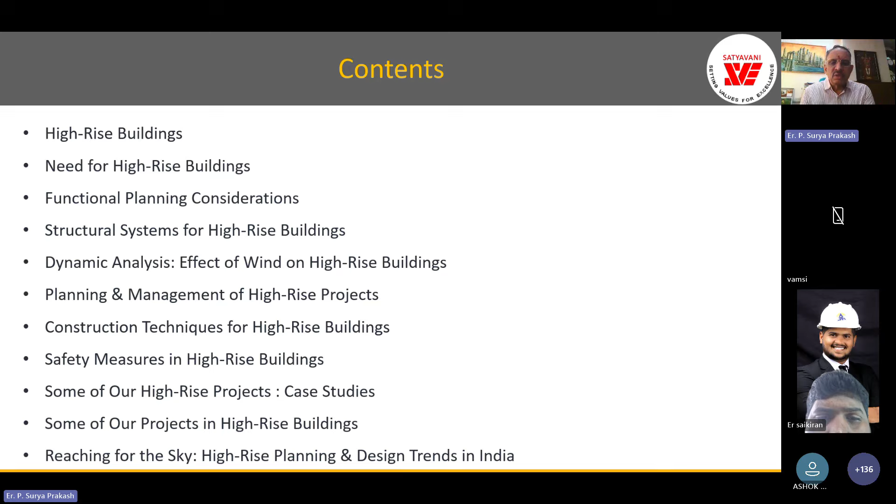Today I'll cover high-rise buildings, need for high-rise buildings, functional planning considerations, structural systems for high-rise buildings, dynamic analysis, effect of wind particularly on high-rise buildings, and planning and management of high-rise buildings, that is construction management. I'll also cover construction techniques, safety measures, and some of our projects, the case studies we have done, and high-rise buildings reaching for the sky. If time permits, I'll cover design trends. This is the order of my presentation today.

A high-rise structure is a tall building. Any building more than 15 meters, as per the National Building Code, is called a high-rise building. In residential, we also call it multi-dwelling units. The need for housing is growing every day due to population growth and rapid urbanization in India. Most cities and states are crossing urbanization of 50% of the population.

So we have to think of how we can utilize the land available and still accommodate the growing population. That is the main demand and challenge that we engineers and planners have on hand. It's a tall, vertically oriented structure. It influences design, construction, and performance. And of course, maintenance and safety are very, very important.

Wherever land costs cross beyond, let us say, 3,000 rupees per square feet, it calls for high-rise buildings. But another challenge is access roads. Nowadays in some cities, not as per the bylaws, people are building 7-story or 10-story buildings on a road width of 30 feet or even 20 feet. That's not to be encouraged or permitted by engineers because it affects the safety of the people living in and around the building.

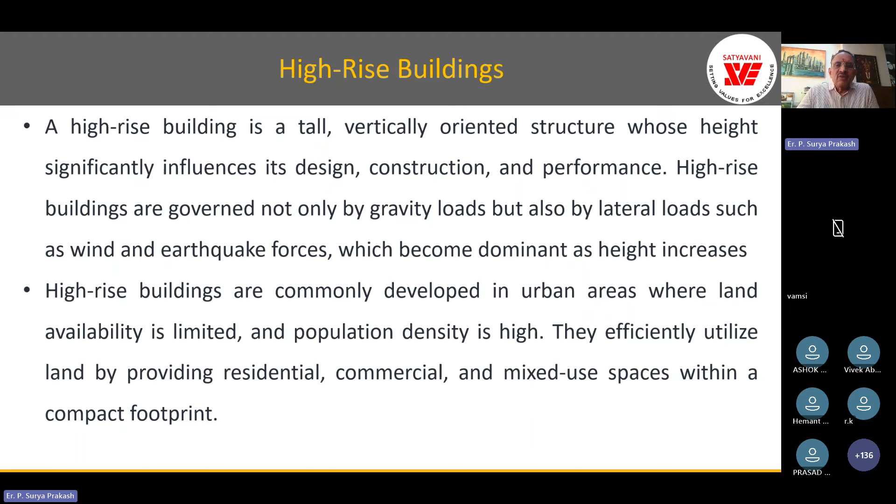We have seen what happened in Nepal post earthquake. It is very difficult to evacuate, to rescue people, and to provide relief. Even for a fire engine to reach the location in case of fire is very difficult unless you have the minimum for a high-rise building, which is more than 15 meters. Even for 7-story, the minimum road width shall be 40 feet. This is what we have to consider while talking about high-rise buildings.

And structurally, if we think about a high-rise building, it acts like a cantilever with adequate strength, stiffness and stability to resist mainly the shear and bending, and overturning effects. This is the main thing.

And it demands careful understanding of the structural systems, because in fact, we all know the best designer in the world for skyscrapers is Bill Baker, who has done the Burj Khalifa building. He made a statement when he was visiting India that in a design competition for a skyscraper, they will first consider only the structural system and the economy in the design.

Because if we don't provide the right structural system, the cost of construction is sometimes going to be doubled. So we also have to think of serviceability criteria of drift, vibration, and occupant comfort. Occupant comfort: when the first skyscraper, the Empire State Building, was built, people learned to design the window panes for wind and to accommodate the drift and vibration during wind conditions. So a lot of codal provisions have come in for taking care of occupant comfort.

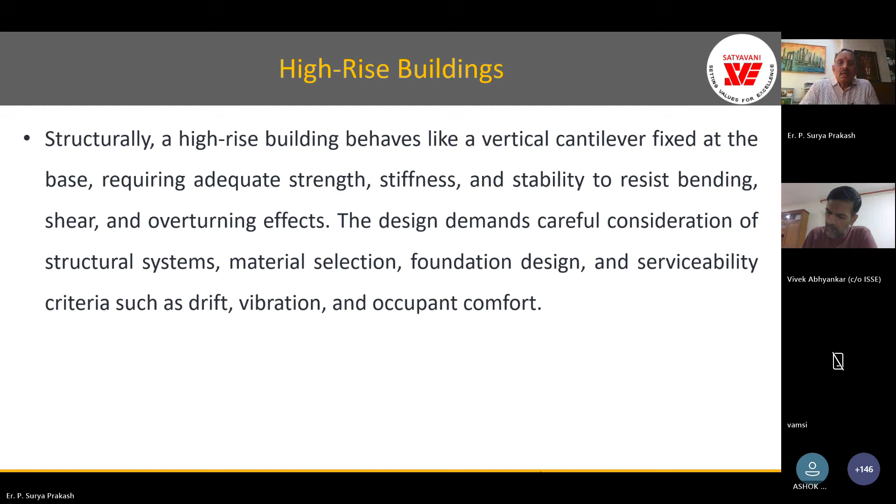When we talk about skyscrapers, Burj Khalifa comes first. I visited it during construction about 3 times, from foundation to finishing. It is so fascinating to see the structural system concept, the construction methodology, and how the building was completed within the timeline. So construction methodology, structural system, and buildability aspects are all covered best in this building. And we can still call it the best and tallest skyscraper as of today.

Just a day or two ago, I saw the Saudi Arabia building is just crossing the Burj Khalifa height now. So we have to wait till its completion for it to be called the world's tallest. Burj Khalifa is the best tall building in the world in structural efficiency and structural concept. And Bill Baker, when he was interviewed in India, made a very interesting statement for a common man. How do you design this kind of skyscraper because of the wind? He said, we confuse the wind.

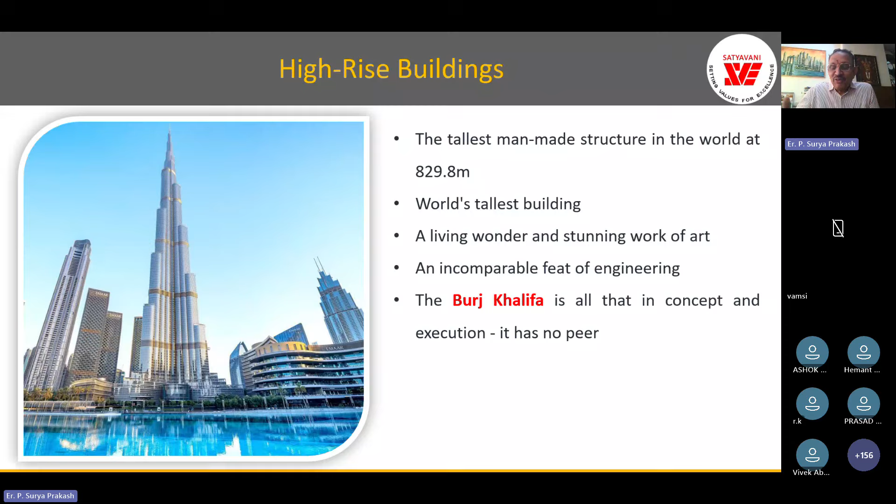So how do you accommodate that kind of additional force in the foundation? What they did is they rotated the building. If you see the Y shape, they rotated the building by 60 degrees so that the drag effect on the building is reduced to half. Because of that, they could use the same foundation designed for 500 meters for this 829. That is the beauty of structural engineering, the beauty of confusing the wind. So this is about Burj Khalifa, information I collected from the designer himself.

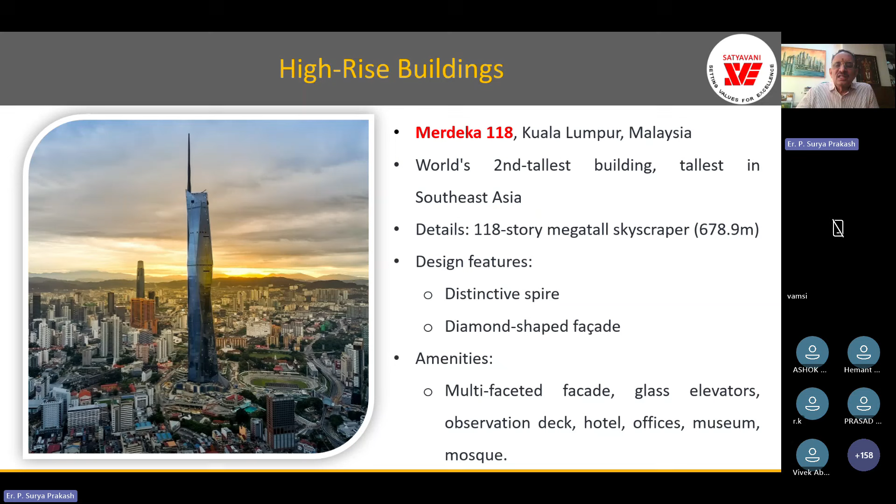Next, high-rise. There are many high-rise buildings. Merdeka in Kuala Lumpur comes next, second tallest after Burj Khalifa. And we have the Shanghai Tower in China, with very interesting shapes. In fact, these are not just the fascinating shapes of the architect. These are shapes arrived at to optimize the loads in the building. Every shape has a purpose of minimizing the wind effects on these skyscrapers.

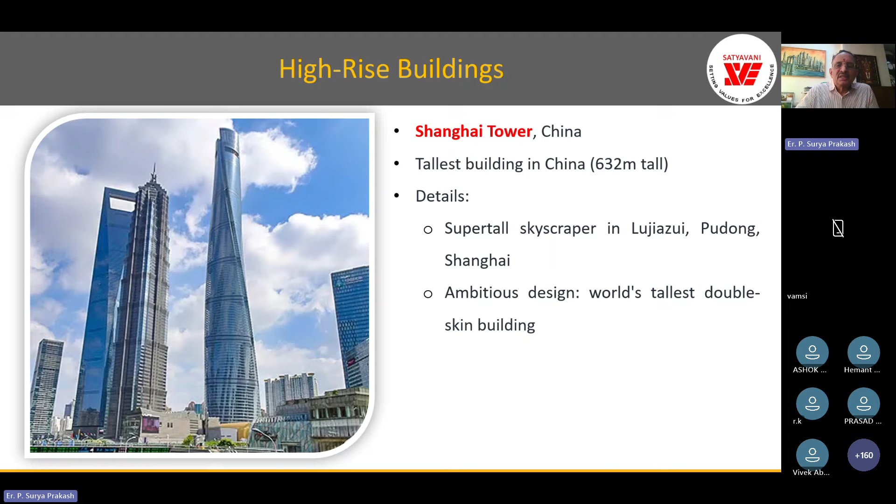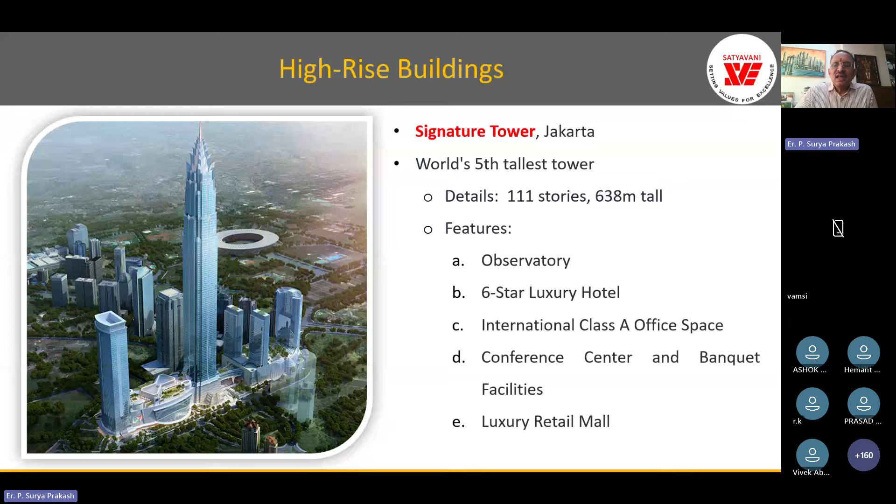And the need for high-rise buildings is to optimize the land use in densely populated areas. If you come to Hyderabad nowadays, in fact, Hyderabad has better master planning. They have identified certain pockets which are called skyscraper zones, so they have encouraged builders to construct skyscrapers. And now Hyderabad is having 60-story buildings and crossing more than that. And the advantage is they have provided the corridor for infrastructure, whether it is approach roads, power, water, drainage, stormwater, all these are very important.

Structural system definitely is important, but before the structural system stage comes, we should also think of all these utilities. And one Singapore funder told me, any FAR more than 7 will put a lot of stress on the infrastructure, that is the utilities. So it's very important to think of these things as engineers for us to encourage or propose these kinds of skyscrapers or high-rise buildings.

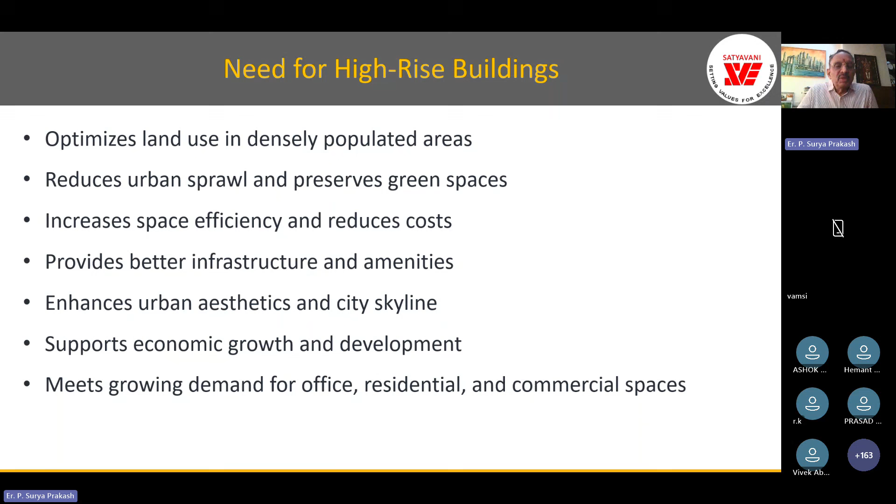And we know that the residential, office and commercial activities are complementing each other. If you have office space, then there is employment. If you have employment, there is need for residential. And if you have these two, commercial or social infrastructure is very important, like institutional, hospital, all these come around these two, office and residential. So we have to think of high-rise buildings wherever the density of population increases.

So finally, the need for high-rise buildings is efficient land utilization, and rapid urbanization and population growth insist on high-rise building implementation, and then economic development and land value optimization also. It is very important. Reduction of urban sprawl, as I mentioned, optimal use of urban infrastructure, and advancement in structural and construction technology will also drive this growth of high-rise buildings.

Over the last 20 years, we have been implementing Mivan or rigid monolithic construction. With that technology, the implementation and buildability of high-rise buildings has become quite handy for engineers, contractors, developers, and builders. So improved living and working conditions because of the compactness.

Suppose you have 2 lakh square feet per acre, which will drive about 1,000 people living in an acre. And we are doing a project on 100 acres in Hyderabad, where the expected population is about 50,000 people. That means 500 people per acre on average in 100 acres, which is quite high.

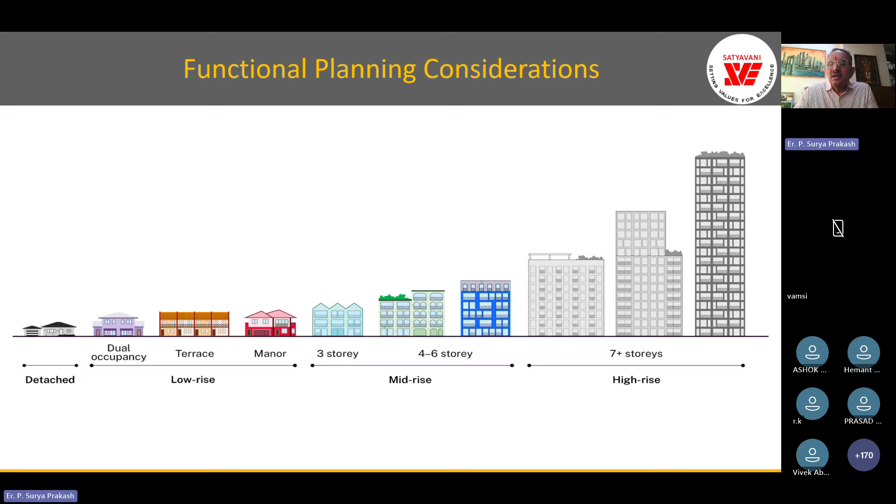So for planning considerations, I'll briefly cover this aspect because it's very important for all of us. Building use and zoning, that is, the development control regulations. We have to study that before even proposing anything, because it covers aspects like social infrastructure availability, basic education, healthcare, all these things. Next comes the important topic of floor planning in high-rise.

As we all know, as the height of the building increases, the service core percentage keeps growing. Normally it is around 20%, the connectivity within the building plan. It grows up to 50%, even 60%, the core requirement. So the core planning and the core location are also very important.

Vertical transportation, whether elevators or escalators, the speed of elevators, number of elevators, capacity of the elevators. We must know there is software available for designing vertical transportation, depending on the number of stops and the type of stops we propose, the population, and the time zones of population movement, whether it is a working population or a retired population. We have to consider that and design the vertical transportation.

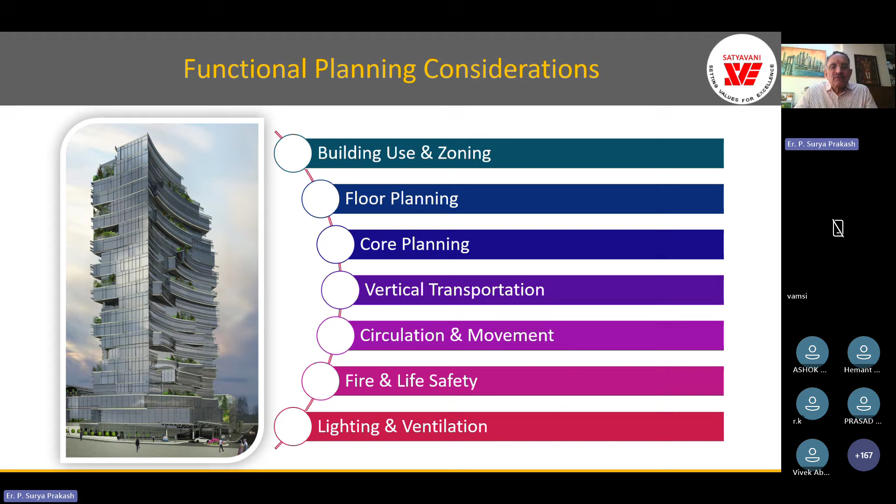We have to see that whatever planning is done provides natural light and ventilation. We are all now talking about green buildings, and for green buildings we have to make the effort to ensure natural light and ventilation are provided. Minimum abutting road width, as I mentioned, and traffic analysis. We do this for all high-rise buildings: the traffic analysis, the adequacy of the road width, and the number of lanes connecting to the building.

Setbacks, that is, the open space around the building. That is very, very important for any high-rise building. The minimum open space required is 7 meters all around the building, for the movement of fire engines and evacuation of people. And internal transport within the campus, corridors, and service ducts.

Yesterday or the day before, I was reading about the LIC building in Chennai, which was the first high-rise building in India, a 14-storied building. It was subjected to a fire accident in 1975. Then they realized that the ducts provided for services, whether plumbing or electrical, carry the fire to the upper floors, because they connect everything, along with the staircases. Because of this, the fire norms changed. We have to plug the duct at every floor level. These are all very important safety aspects.

And fire escape staircases and travel distance, as I mentioned. In high-rise buildings beyond 30 meters, we provide pressurized shafts. We have to provide a pressurized staircase and pressurized lift so that people can escape through them without being affected by smoke.

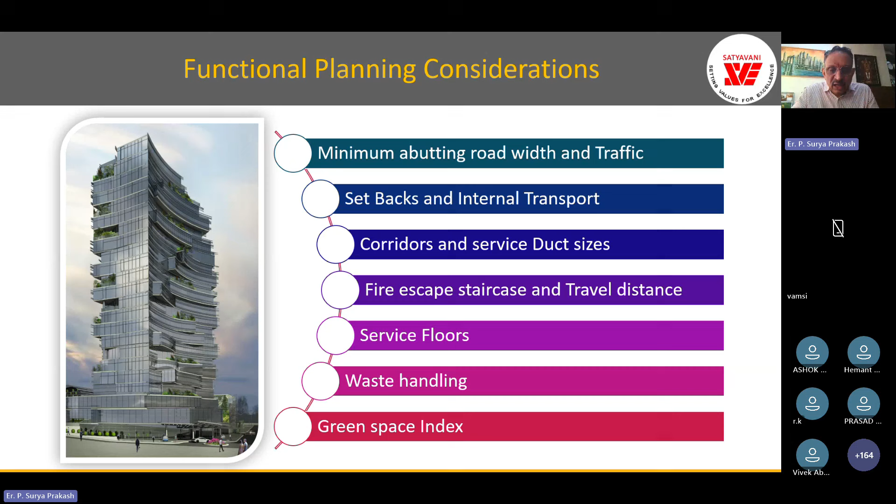In Singapore, the green space index has become compulsory. That means if you are constructing a building on 1 acre and you provide greenery over an area of 4,000, then your green space index is 1:1. So we have to think of the green space index when we are densifying areas with population.

Now, for us, the most important structural systems for the high-rise buildings. Let us see the structural systems of the available buildings, already constructed buildings. And before that, let us understand what is moment resisting frame. That is the very basic system.

For up to 7 floors or 10 floors, we can have just moment resisting frames. And then beyond 10 floors, we must have shear wall systems. We'll add the shear wall. And then we also have dual systems, that is combination of shear wall and frame. When I say shear wall, nowadays, the Mivan or rigid monolithic construction is with the complete shear wall system.

And next is the tubed frames or outrigger systems. So these are further advancement. In fact, Fazlur Khan from Bangladesh, he is the first one to introduce these tubed frames. He is inspired from the bamboo, because bamboo tree is the natural tallest structure actually. Tall in the sense of slenderness, from the slenderness ratio, height to minimum dimension. So he is inspired from that natural structure and then devised these tubed frames.

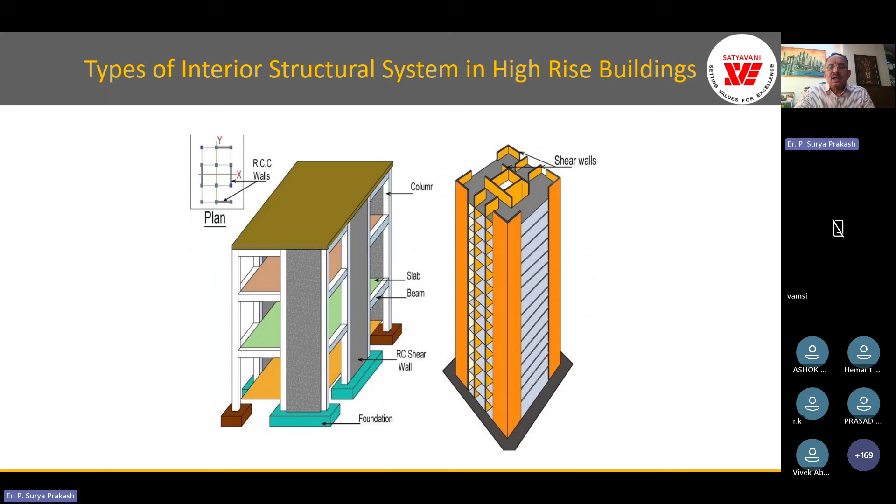And in Chicago, the first tubed frame, Sears Tower, it was the tallest in those days, during the 1970s, about 50 years back. And after that, further advancements have come with the outrigger systems and buttressed core and all that. Let us examine these systems. You can see in the picture the shear wall and the frame combination. And on the right side, you can see the cores and the shear wall combined with the frame also.

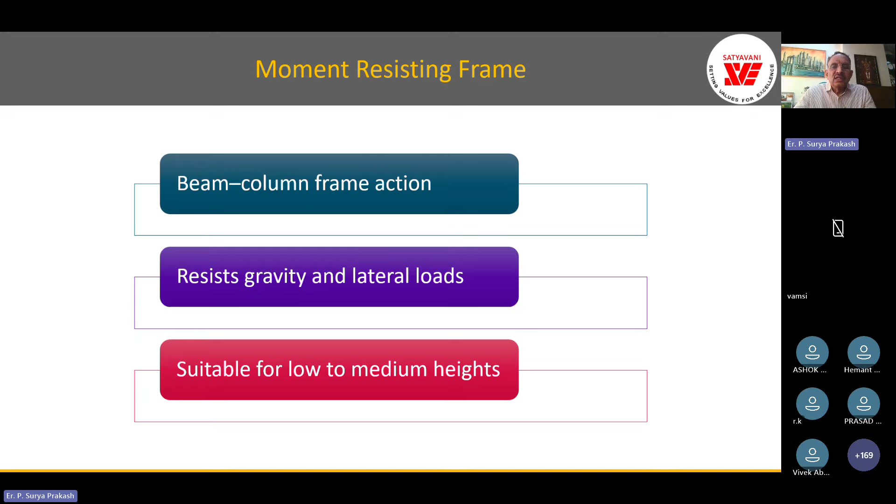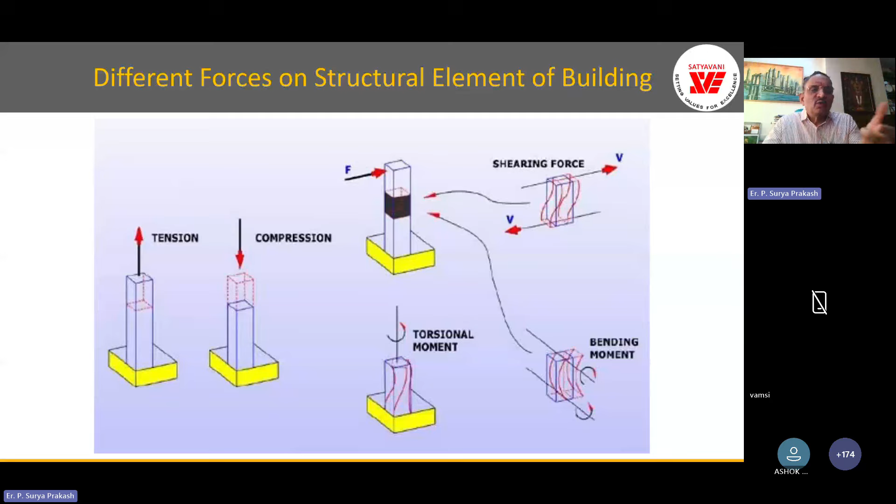Beam column frame action resists gravity and lateral loads, moment resisting frame, and suitable for low to medium heights. As I mentioned, anything from 3 floors to even 10 floors, we can go for these moment resisting frames. And as structural engineers and civil engineers, we must know the basic things, whether it is high-rise building or normal building: tension, compression, shear, bending, and torsion. These are the forces for which we have to think of designing and resisting using these capacities of the elements. So we should know which elements are good in resisting what: tension, compression, shear, bending, and torsion.

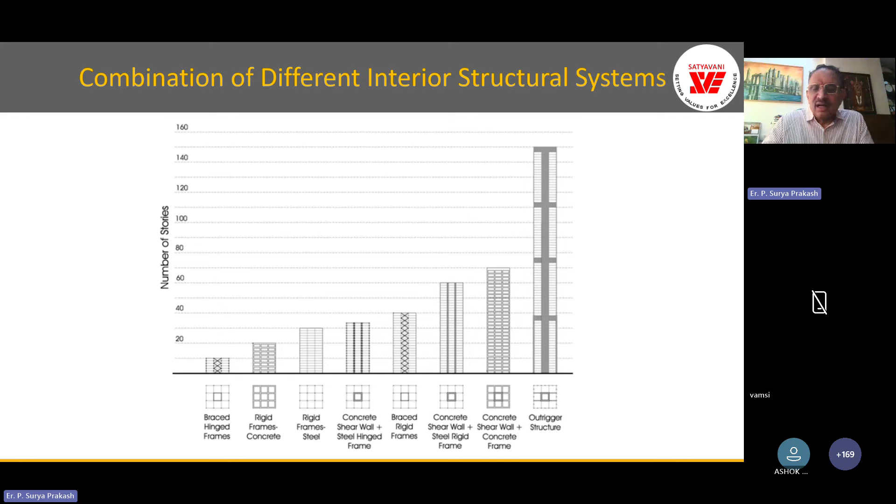And now let us look at worldwide, what are all implemented. We have the braced hinged frames, we have rigid frames and rigid frames in steel. We have concrete shear wall and steel hinged frame. And we have braced rigid frames, concrete shear wall with steel rigid frame, concrete shear wall and concrete frame, and outrigger structure. That means we have the central core connected with the rigid diaphragm to the outer frame. So that is called the outrigger structure.

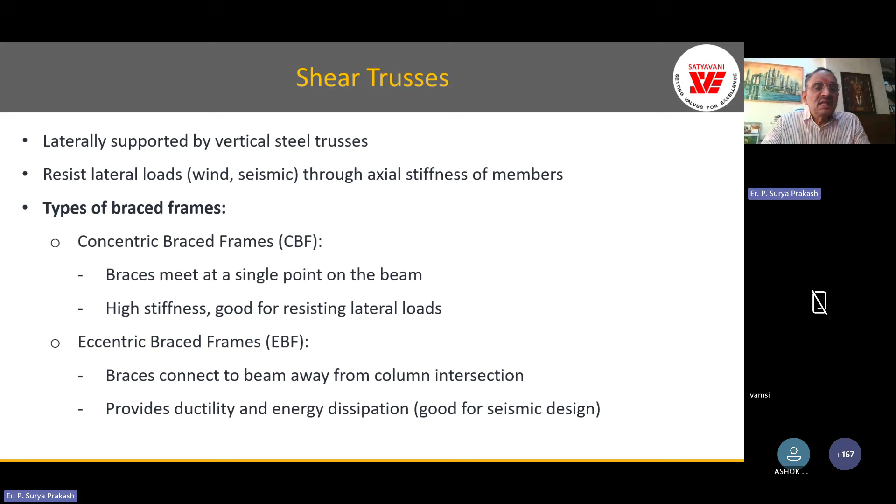So now laterally supported vertical steel trusses in shear trusses resist the lateral loads, and the main lateral loads are wind and seismic. And then braced frames, we have concentric braced frames and eccentric braced frames. And mainly, let us understand whatever structural system we are talking about is finally to dissipate the energy. And we can dissipate the energy with a little bit of flexibility in the structure rather than total rigidity, actually. That is the ductility we are talking about.

So that's why we use steel also in the structural system, because steel is very good in ductility, but it has 2 disadvantages: fire resistance and corrosion problem. Shear trusses are effective in resisting lateral load and can be designed for high stiffness and ductility depending on the type of the frame.

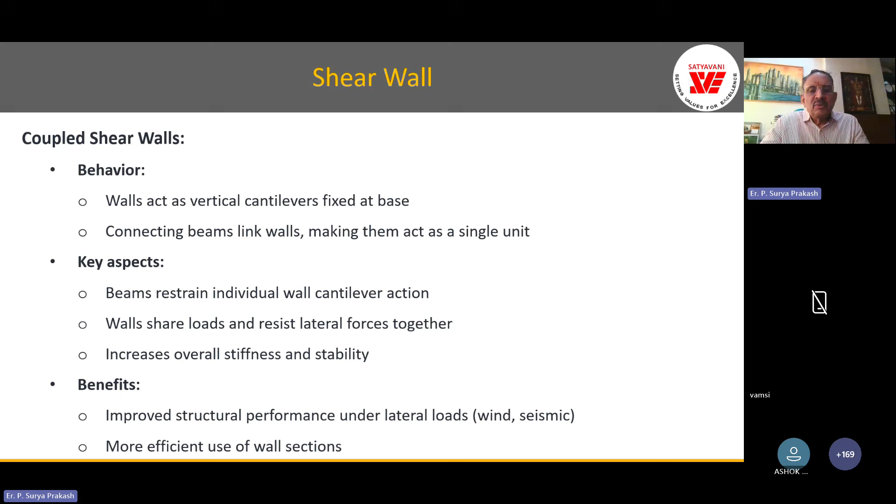Then coupled shear walls: two shear walls coupled with the beam connection will help. In a beam we have tension zone and compression zone. So similarly a shear wall, which is a very rigid thing. If you have two shear walls on the windward side and leeward side, then it acts as a beam with the coupling as shear connectors to these two stiff shear walls. Basically, shear wall is a plane stress element, and they share the loads and resist lateral forces together, and improve structural performance under lateral loads, particularly wind and earthquake.

So let us look at this structural system like a braced frame and shear wall with base isolation. So this is the basic structural system for any earthquake resistant design or wind resistant design. For earthquake only, we need the base isolation. For the wind, we need these bracings, which will be very effective, and shear walls in transferring the loads.

So now let us look at the rigid frame construction, that is rigid monolithic construction, which is quite prevalent nowadays in almost all the high-rise buildings and tall buildings. This has become a norm. So we have to understand the structural system of this, and the name itself indicates it's a rigid monolithic construction. And the advantage is by the time we complete the structure, we also have completed the shell. That means walls, internal walls, and all that.

But the only major thing is we as structural engineers have to insist on having the shear wall continued up to the foundation. In this picture, you can see in the bottom there are columns and the so-called transfer slab. We have to discourage this as structural engineers because in performance it's not very good, and cost effectiveness is also very less, because we are not utilizing such a long shear wall from the top to almost parking level. In the parking level, we are terminating the shear wall. So we are not transferring the complete stresses to the foundation, and we are again creating a transfer slab which will transfer the forces from the shear wall to the columns, and the columns are like a soft story again.

So this is very, very important. We have to keep in mind that we should take shear walls through. Many people say that architects resist this, but I feel that what the developer or architect needs is to plan for the parking. So give a plan. In the shear walls, we can give openings and give the driveways through shear walls. We have done many projects where we have continued these shear walls and derived the advantage of structural efficiency.

Next, they're designed to resist vertical loads as well as lateral loads. And if there is any bad structural system, this is what is going to happen, the failures without proper jointing and without proper transfer medium. So let us understand the shear wall classification. Simple rectangular type, coupled shear wall, rigid frame, framed structure with shear wall, and column supported shear wall. This is what I was telling, not very good.

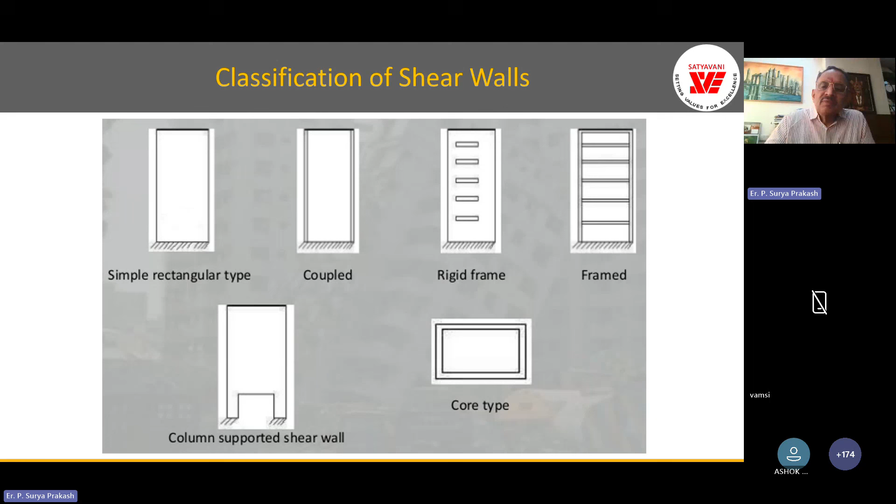And core type. Any building requires staircase and lifts, and they are very good to implement with a concrete wall, particularly pressurized staircase and pressurized lift. Then you can have a core type, and the core you can connect. So that's how this buttressed core concept comes, and you can have the shear walls buttressing the core. So these are all the RCC shear walls. As I'm showing, you have to preferably take the shear wall down to the foundation.

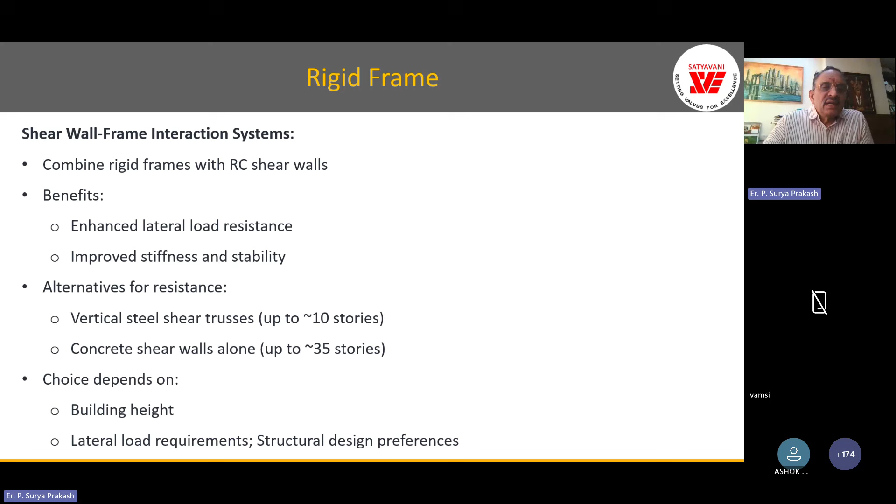Shear wall frame interaction systems, and so these are all the buildings. The good part about it is we are now almost crossing 100 years and 125 years of these tall high-rise buildings constructed in concrete. So we can study their behavior and efficiency, how they have done, more than a century old buildings. So these are all the buildings that exist, and these are the structural systems of braced frames, wall frames and core systems. I'll just quickly show you the structural systems of some existing buildings, hybrid structures and structural systems.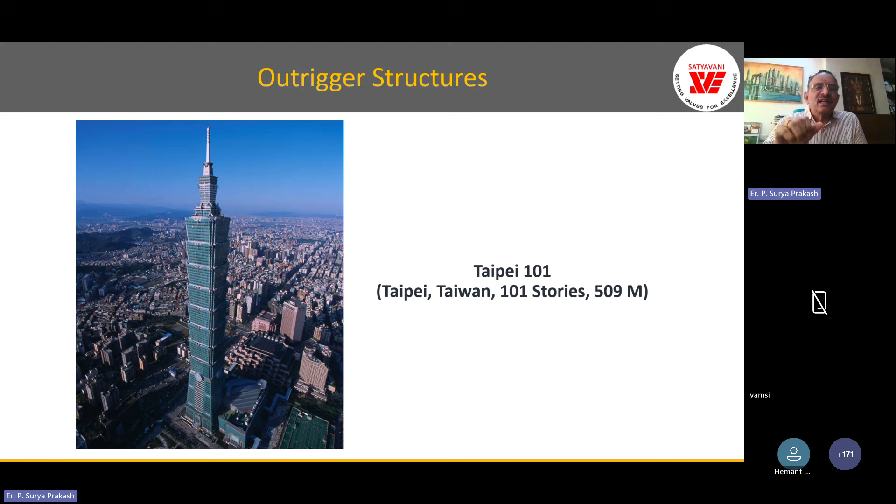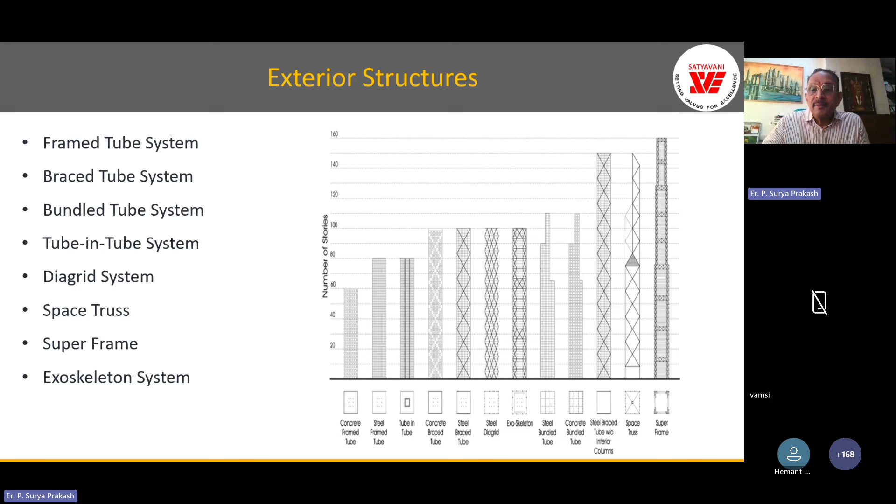And similarly, exoskeleton is another; I'll show you some of the existing buildings in these structural systems. Super frame is another very interesting concept which was used in the World Trade Center. Of course, it's not existing now. So these are all the frame tubes.

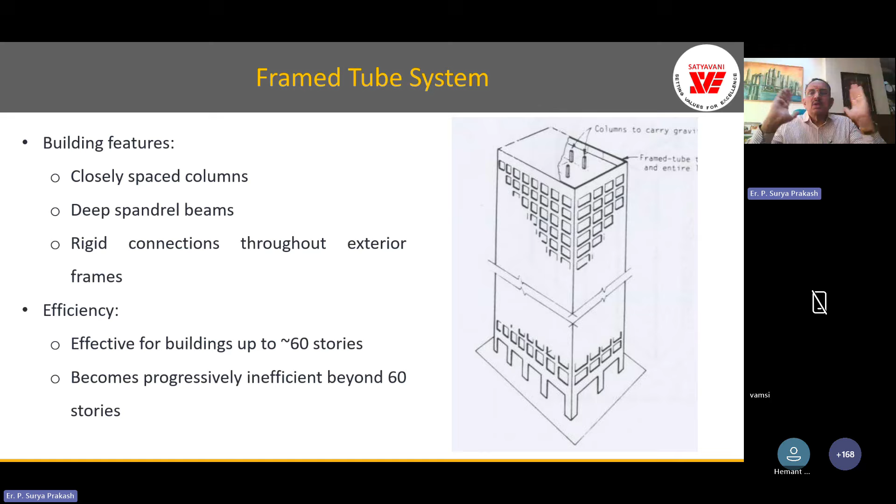That means the outer core is designed to resist the lateral loads, and the inner core is designed to resist only vertical loads. But shear lag is the major challenge in these frame tubes, because at the corners the theoretical versus actual stress will be a lot of difference. So we have to be very careful in using this kind of structural system.

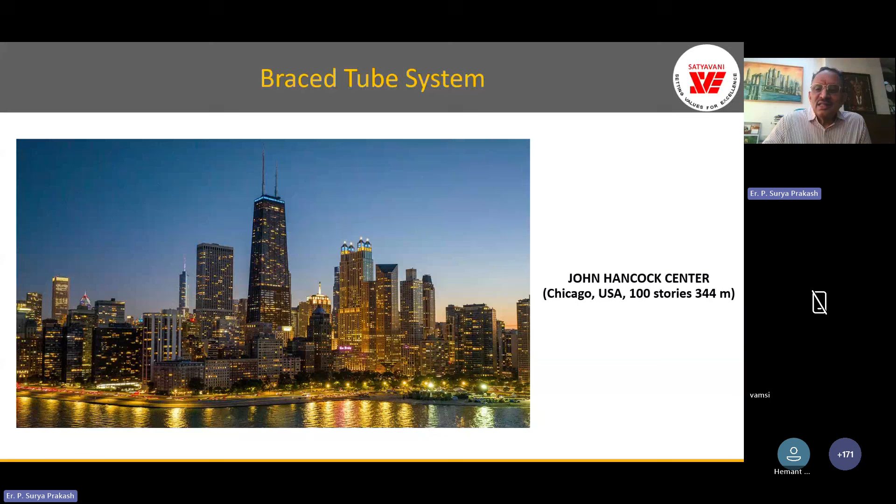Aon Center is a frame tube, and then braced tube systems. We can see the load path and braced frame. And this is John Hancock Center in Chicago. You see a lot of these frame tubes in Chicago because Fazlur Khan was from Chicago, and there is a Fazlur Khan Foundation actually encouraging more innovation in this.

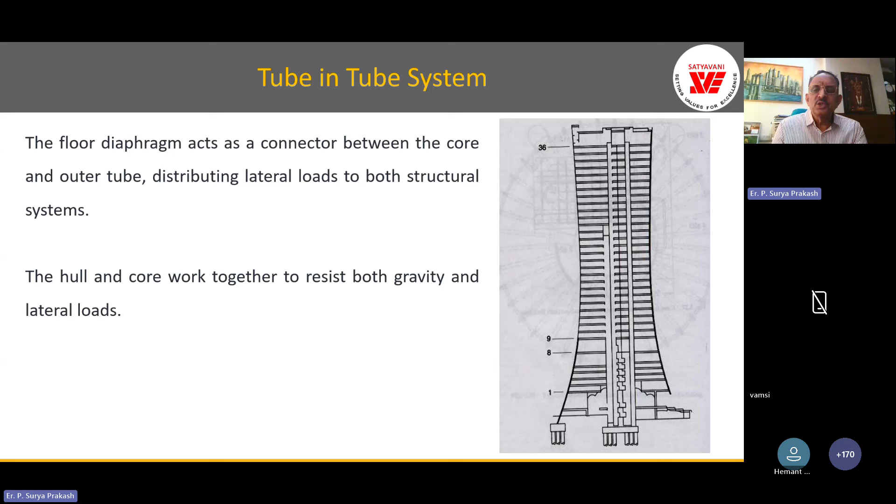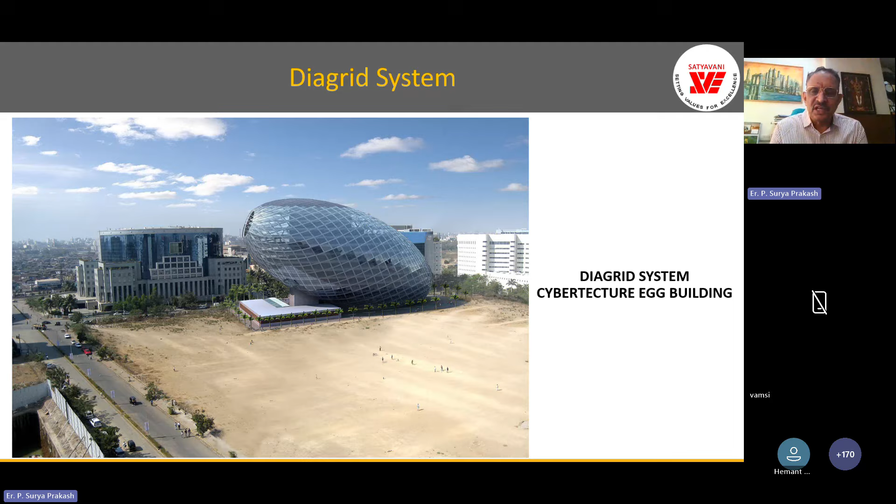Next is tube in tube. This is West Madison Street, Chicago, a 50-story building with a tube in tube system. And diagrid system, this is one of the examples. This is not a real high-rise; as I mentioned, for different shapes only diagrid will be efficient. Super frame, as I mentioned, is not existing now, but this was one of the best structures constructed in steel.

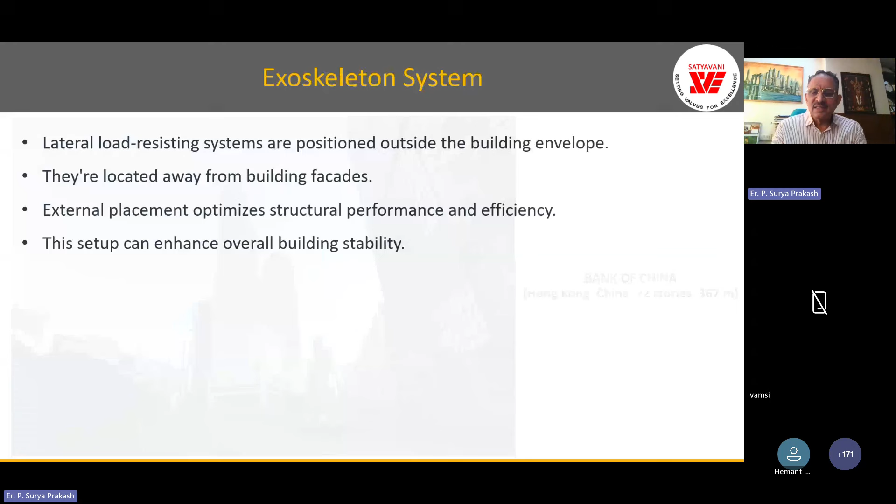And space truss: Bank of China is a very interesting structural system with aesthetics. And exoskeleton: this is Hotel de las Artes in Spain. You can see how beautiful it is with the bracings, and the structure itself becomes the facade. And for a hotel, the facade is always very important. People connect to the hotel with the facade actually.

Next is the buttressed core, the latest and best that we have seen, Burj Khalifa, very efficient. When I visited this structure, in the basement the column minimum dimension is 500 mm for such an 828 meters tall building.

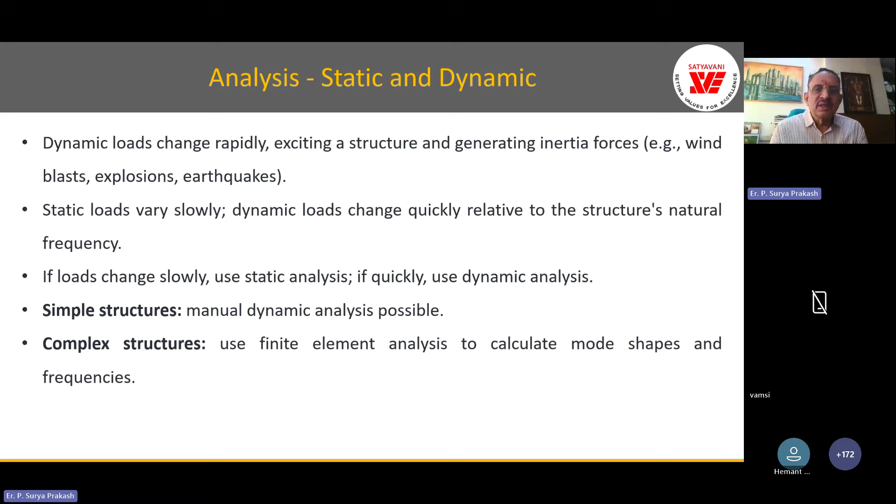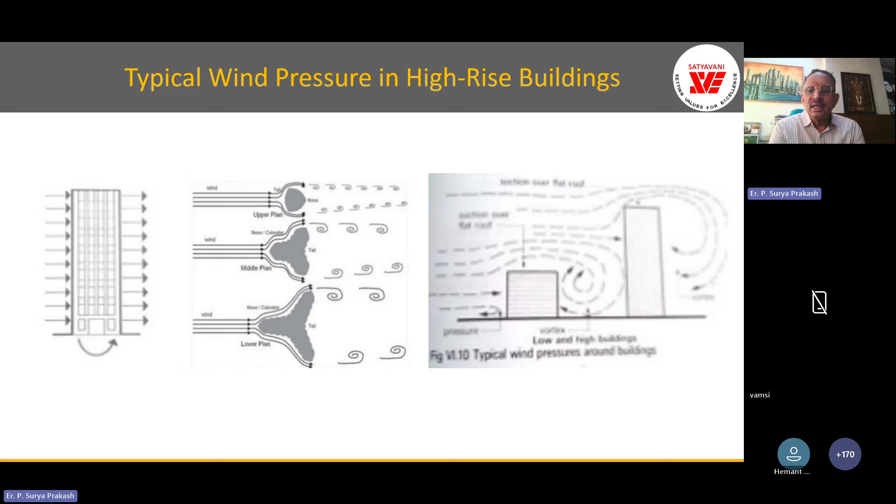So next, let us come to dynamic analysis and the effect of wind on high-rise buildings, because wind governs the structural efficiency. With wind load, we know that there are drag effects and dynamic effects. You can see on the leeward side there will be drag effect. So shear, moment, and deflection are the three things we have to study. So static effects and dynamic effects. These are all how the wind hits the building.

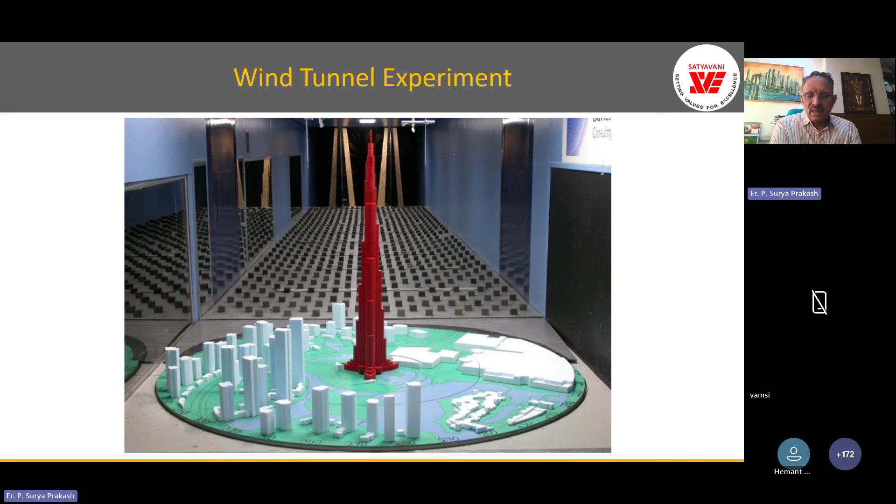I'll show you some. These are the wind tunnel studies. In fact, for Burj Khalifa, when they reoriented the building, they again studied the wind tunnel effect, and they found actual reactions were reduced because of the orientation. These are the wind tunnel experiments, and you can see how the wind affects the high-rise building. This is the digital model of this wind effect.

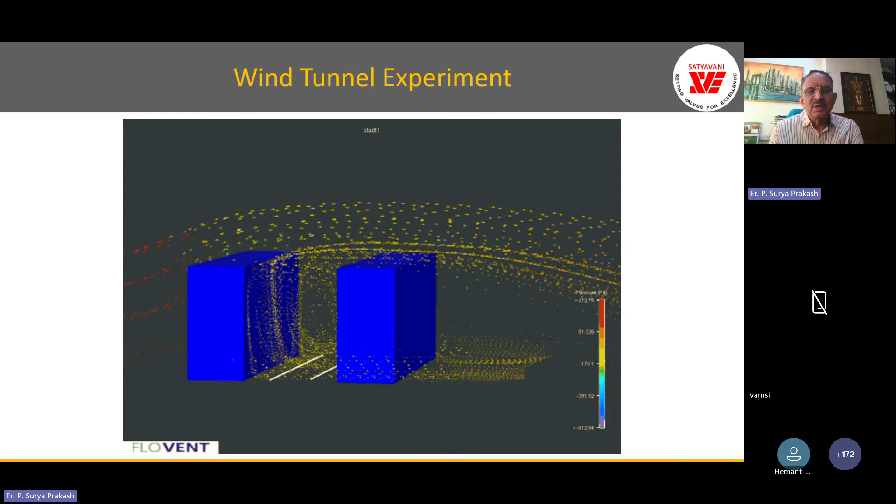And if you have two high-rise buildings, you can see how it behaves. And with multiple buildings, like New York City, you can see how the wind flow affects them. So we should understand that we can never take the effect of drag on a single building alone.

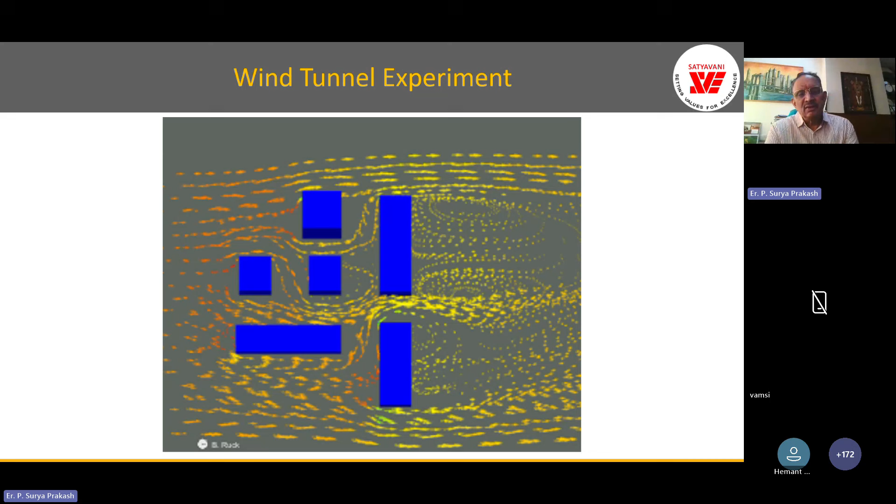That's why for any high-rise building beyond 50 meters, it is better to recommend wind tunnel studies to understand the real effect. The codal provisions give you calculation of the drag effects, but don't go by just theoretical and analytical calculation. Go for these wind tunnel studies and understand the wind. So this is how the wind is simulated in the wind tunnel.

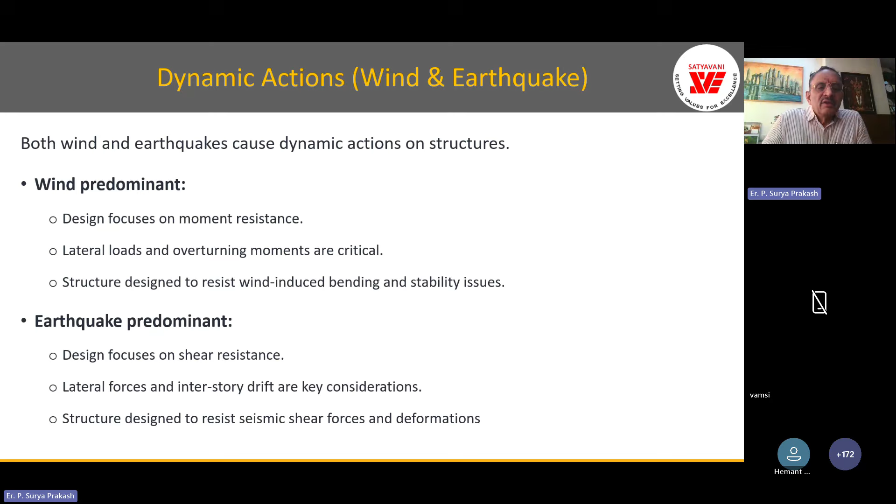Next is the earthquake. For earthquake also, we have these shake table labs in Bangalore in CPRI, and in Delhi also, I think. I don't remember exactly. There are two, Roorkee, I think. So we have to do the model studies. We can only do the model studies, whether it is wind tunnel or shake table. And wind predominant and earthquake predominant. When earthquake predominance is there, we have to go for the base isolation.

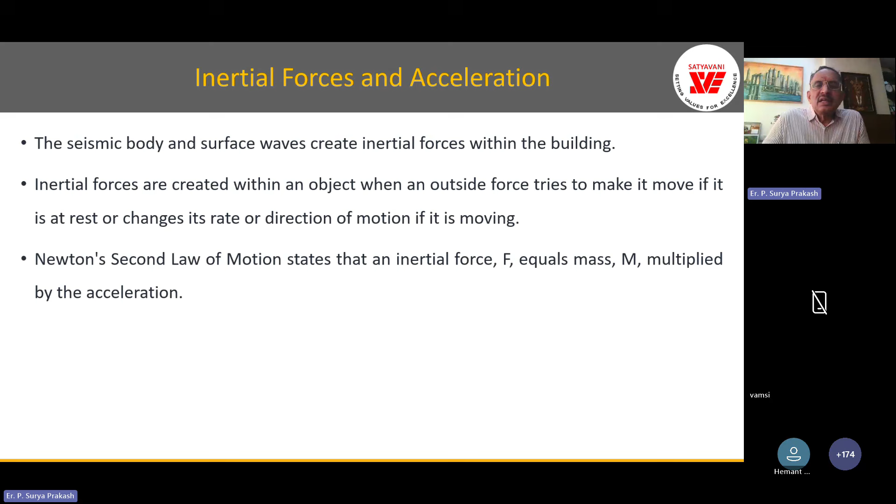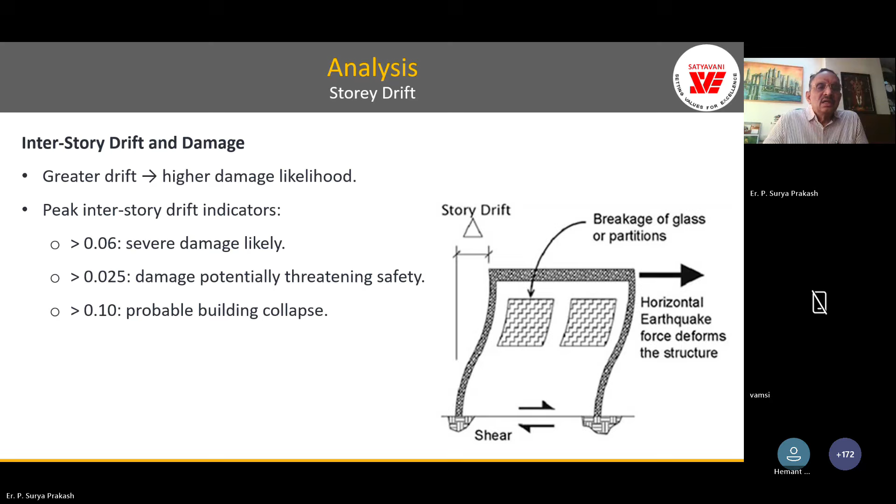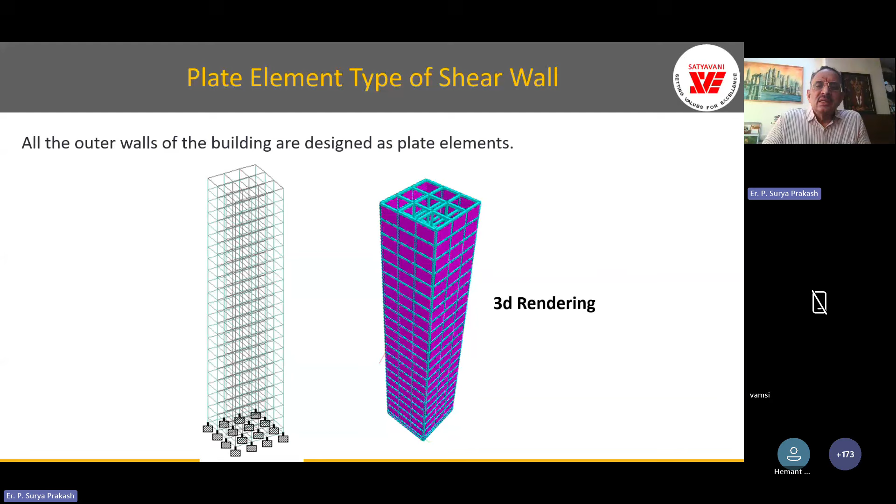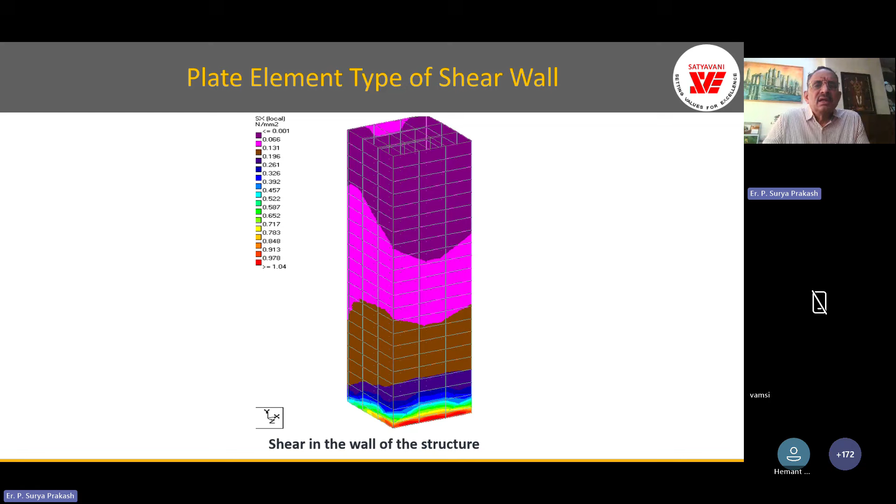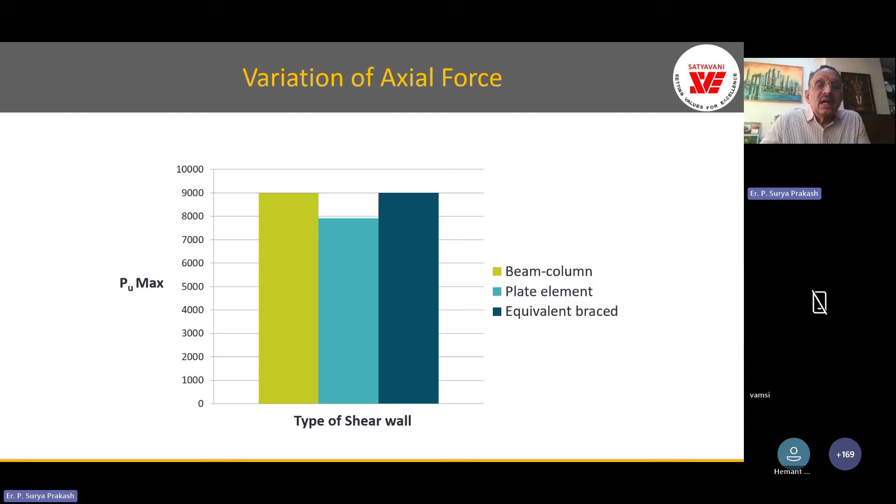We have studied column, plate element, and equivalent braced. Equivalent braced, or you should also study with the plane stress element. For the same structure, same load, you can see the variation in the Pu max. When we are using the beam column and equivalent braced, we are getting the higher axial load. The variation is almost 12% from the plate. When you use the plate element, you will underestimate the axial loads by almost 12%. So we have to be very careful when modeling high-rise buildings in using the right element in the finite element or STAAD analysis.

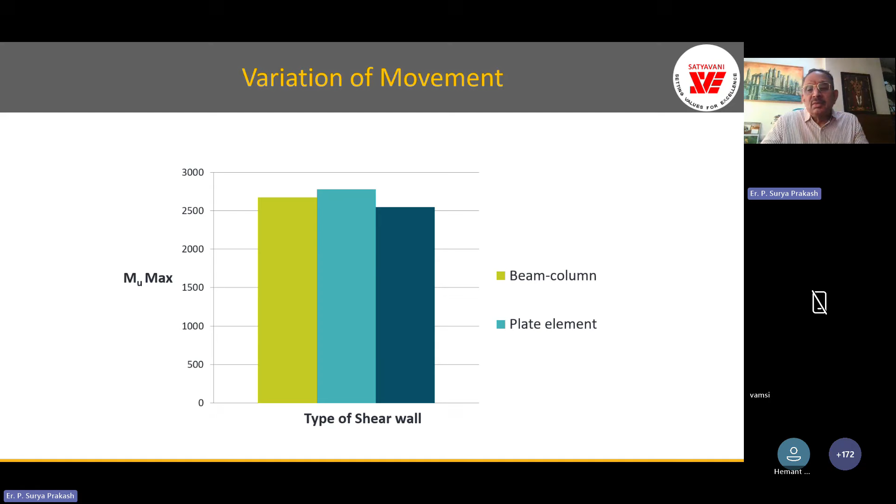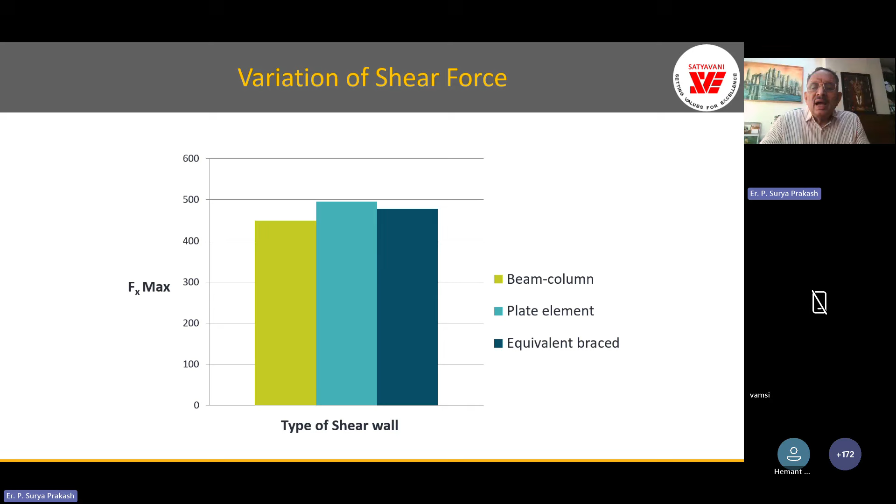And moment, if you see, sorry, the spelling is wrong, it is moment. Moment in the plate element is higher because plate element is basically a moment element. It's a flexural element. Then beam column comes next, and then shear truss, that is braced column bracing system, gives the least moment. Next is the shear. In the variation in the shear force, beam column gives the lesser shear force, the braced frame gives more reasonable, and plate element gives the higher shear force. So the conclusion is, for the shear walls, better to use the plane stress elements, basically.

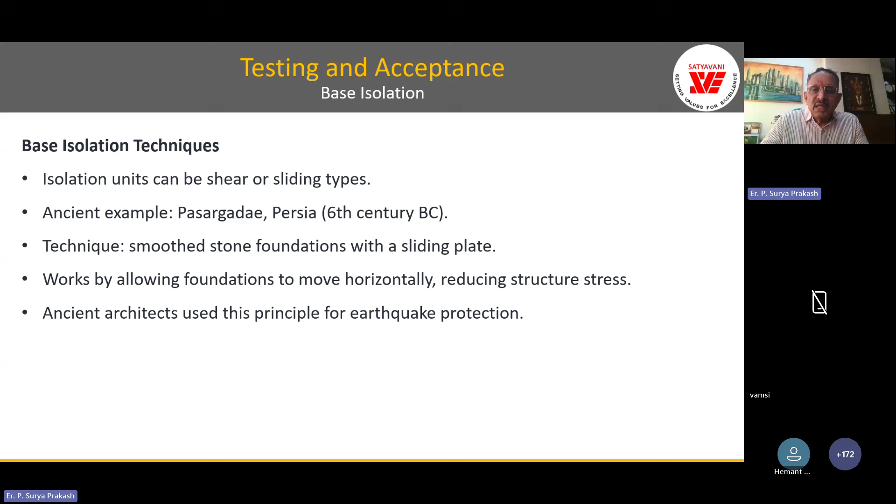Next is the planning and construction management of this high-rise building: time management, quality management, very important, building information modeling, and risk and construction management, that is controlling the cost, controlling the time. This is very important. So I'll briefly touch upon this construction aspect. Engineered formwork is very important, and safety during construction is also very important with the platforms, railings, and all that. Auto climbing formwork is a very efficient system for the core and shear walls. We can use this auto climbing formwork.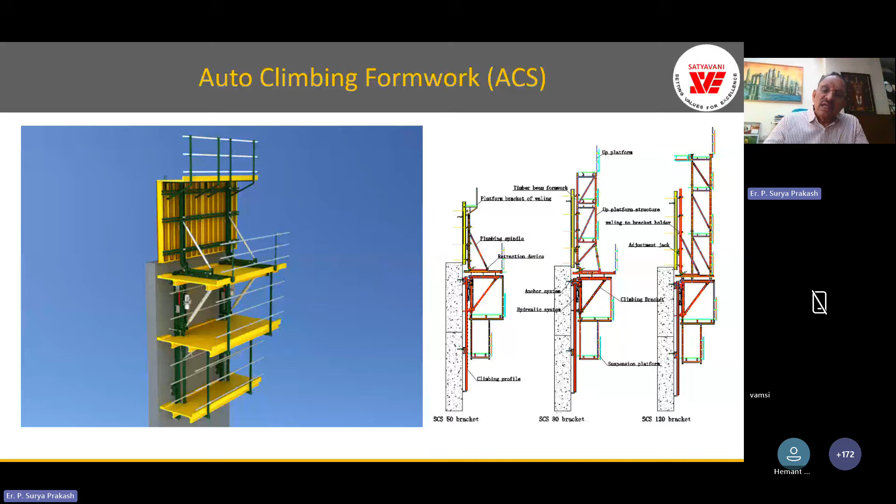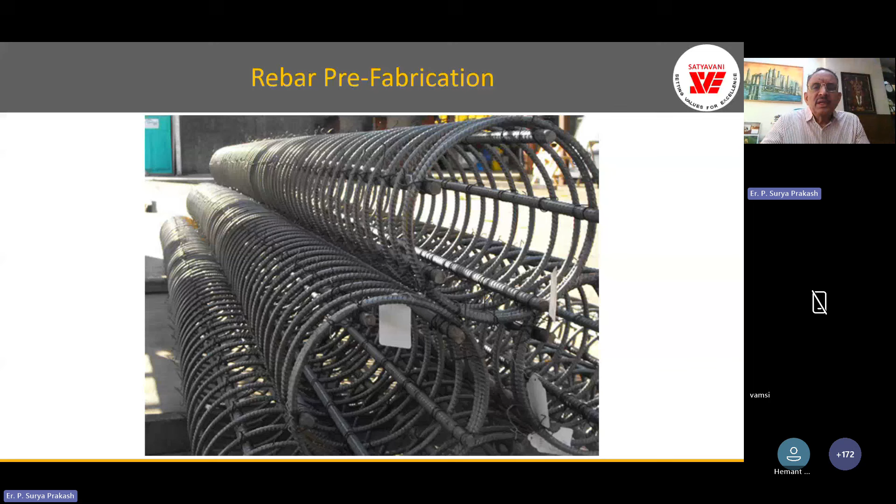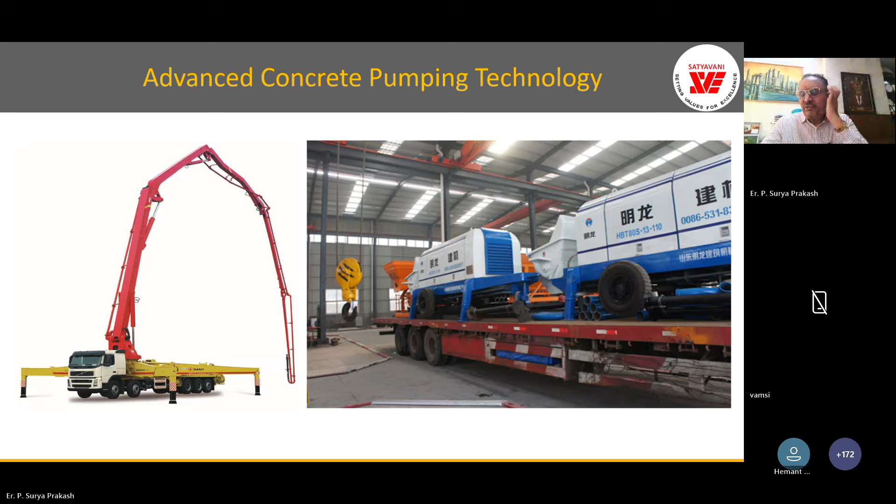Next, the rebar fabrication: accuracy in rebar placement and tying is also very important. So we have to use prefabricated rebar, which will be very good in quality. Next is the concrete pumping. In Burj Khalifa, Germans designed a special pump for pumping concrete up to 500-meter height. And in Hyderabad also, when we did the first tall building, we had to get a special pump from the ready-mix vendor. Next is the drop head systems for reducing the cycle time of the centering and formwork.

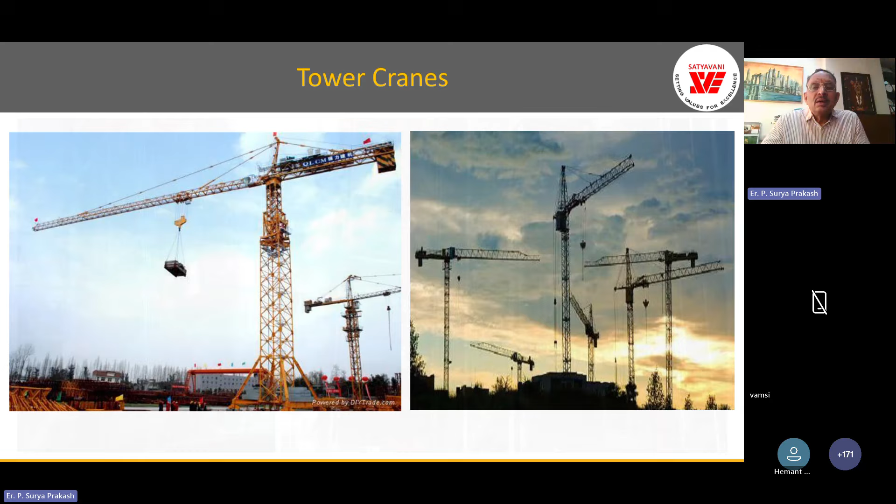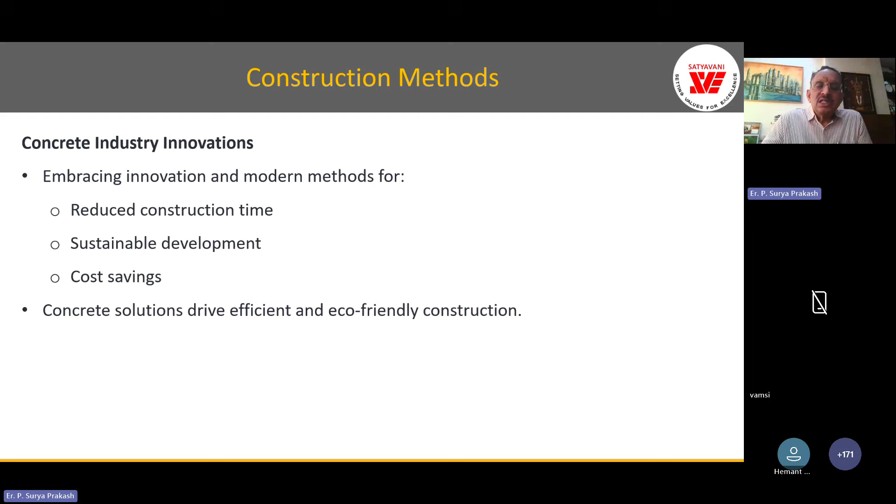And the major equipment used is tower cranes, we all know. And now we have these rope suspended platforms, and also builders hoists or passenger hoists or multi-purpose hoists that we are using in high-rise construction. So reduced construction time, sustainable development, and cost savings is in using these construction methods.

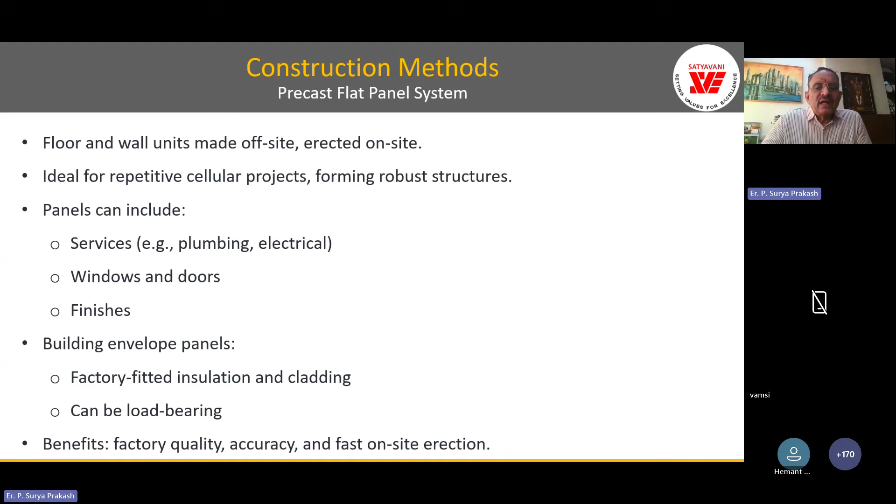And plumbing and electrical, firefighting, finishes, windows and doors design, and building envelope panels, factory fitted insulation and cladding, and it can be load bearing also, and factory quality, accuracy, and so this is the precast flat panel system. So we have also done precast construction in Hyderabad, where we have done up to 11 floors, but my group has done up to 50 floors.

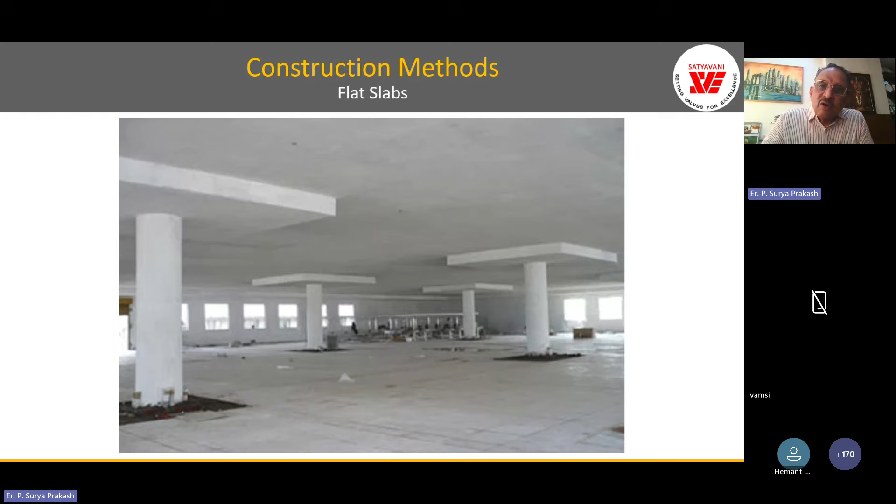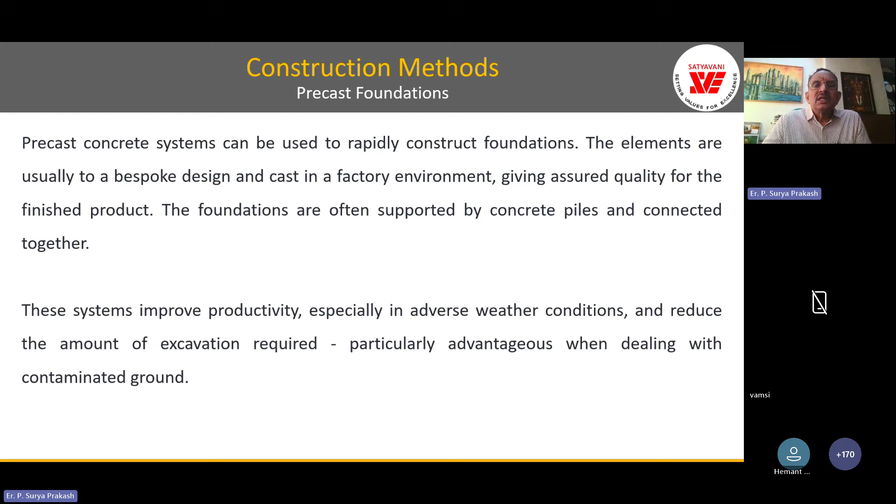So in precast, 3D volumetric is also coming up, and tunnel form for high-rise residential. And we have this rigid monolithic construction and flat slab systems with the table form we can do for office building, and hybrid concrete construction that is using precast and cast in situ rigid monolithic. That also we are doing in some of the projects, and precast foundations, pre-stressed concrete in hollow core.

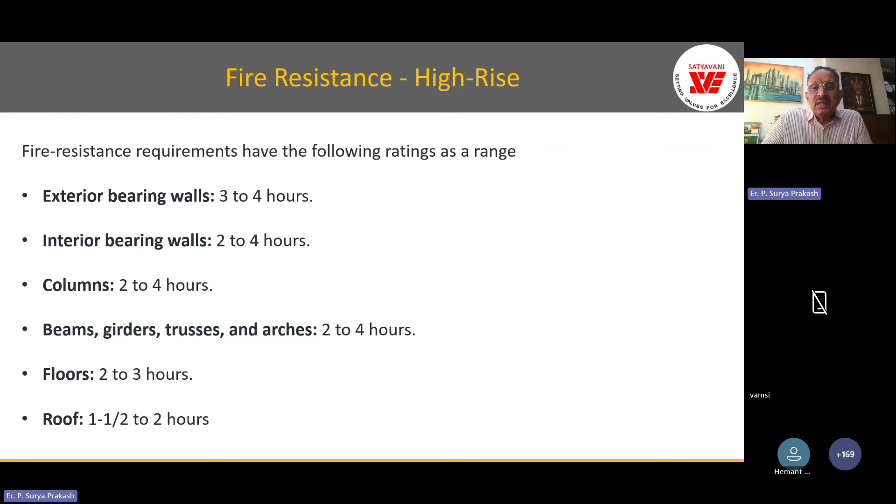And disorganized site versus organized site. So we have to insist on organized construction in high-rise building. And safety measures are very, very important during construction. And safety, fire rating of the walls and various elements, columns and all, we have to take care of the cover in the design. So fire safety is a very, very important subject. I'll not go into the detail, but we should be aware that we have to think of these things.

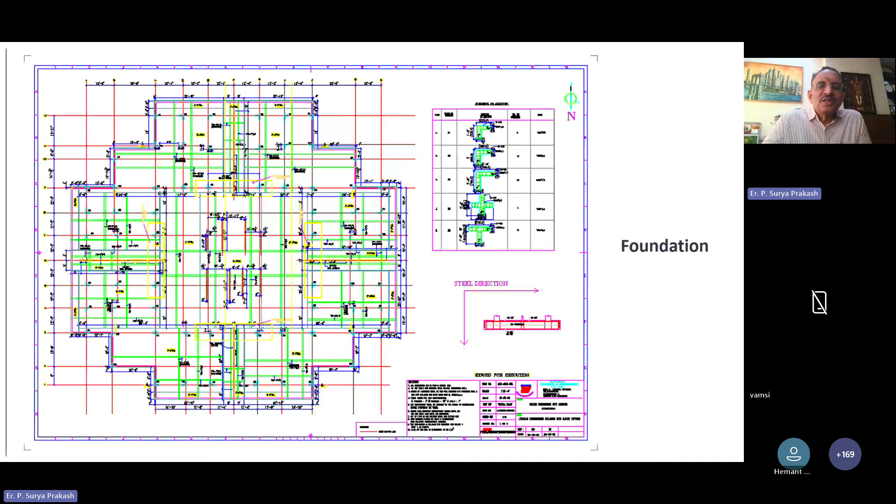So I'll just show you quickly some of the projects that we have done. This is the first tall building in Hyderabad. After this, many have come, but before this, the highest building was 15th floor. This we have done 30 floors. And this is a buttressed system. Even before knowing about the buttressed core of Burj Khalifa, I have modeled, designed it as a buttressed core system. So these are all the plans of this building with a podium and 2 towers.

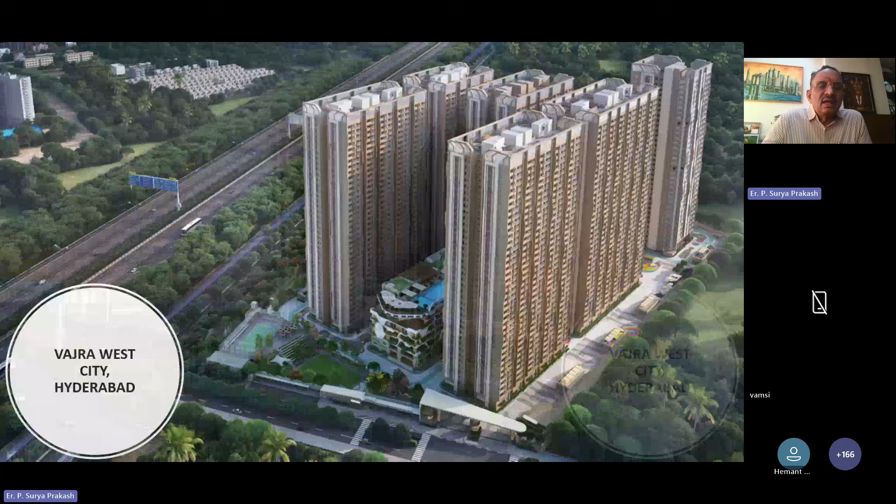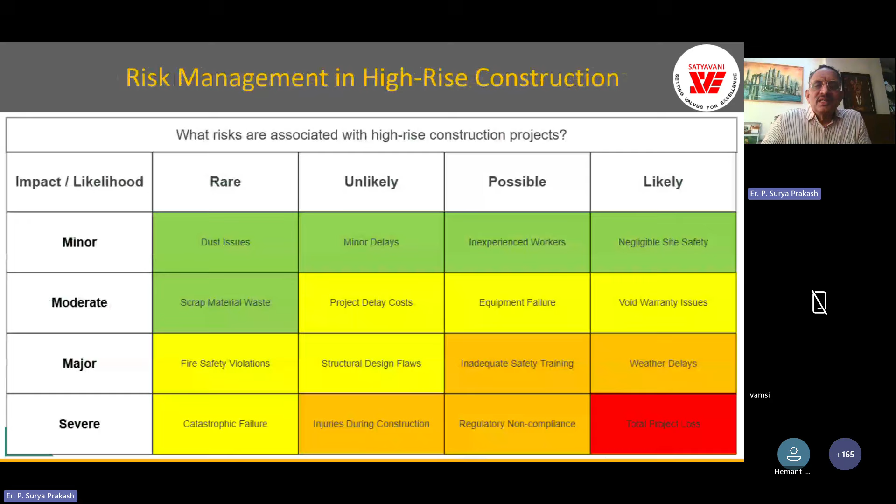So I think I'll try to conclude now so that we can have some time. This I'll not cover today because time is not enough. So finally, we have come to the end of the session.